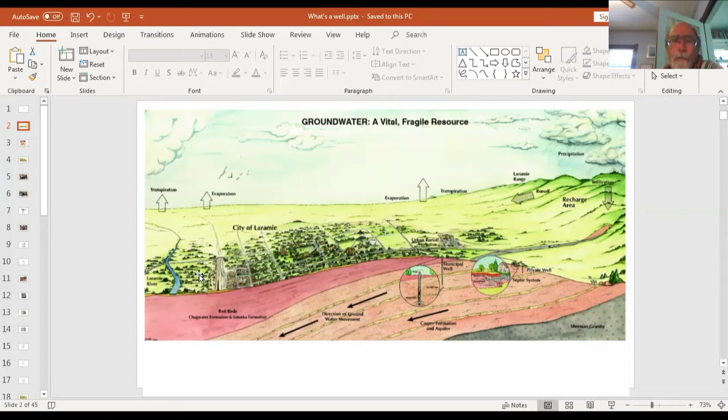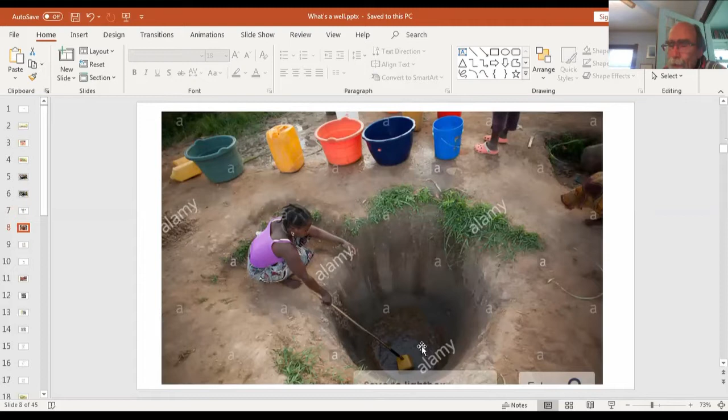It may not be enough to do anything useful with, and it may not be fit to drink, but in most cases there's water down there somewhere. Most of the world, when they're drilling a well, either paw out a hole as an elephant or a horse will do, or humans, with a bit more ingenuity, will actually dig a well. So they end up looking like this. This one they didn't need to case because the earth materials were stout enough to hold up by themselves, and she just runs her bucket down there on a stick and pulls the water out.

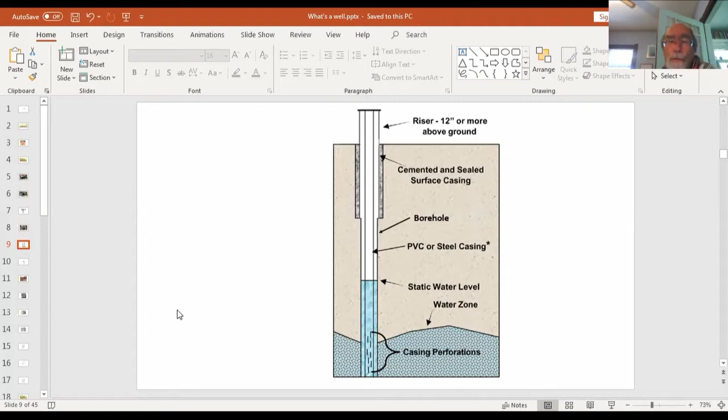And that is done with a drill rig. So if you're with me on shoving the hose in the ground - I can't go very far, but if I wanted to go further, I'd put some teeth on the end of that hose and grind it around. I'd substitute for my garden hose a piece of pipe with some teeth on the end, but I'd still be squirting water down through it, so as those teeth ground things up, I'd be flushing the grindings up the sides of the hole.

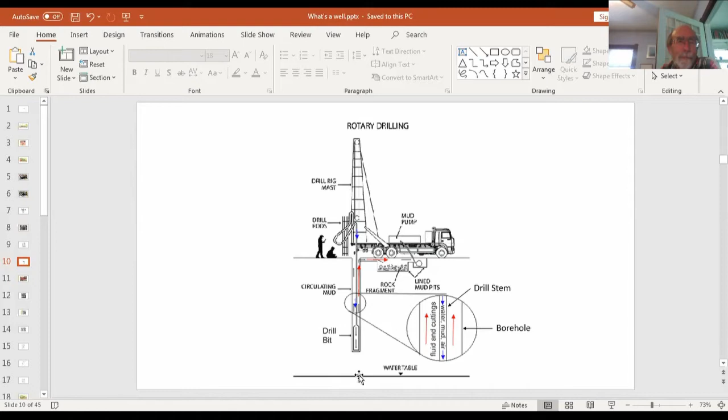My little drill rig here is drilling a water well. He's going to keep grinding this away until it gets down to the water table, he or she, and then we'll go ahead and put some casing in the hole and have us a well.

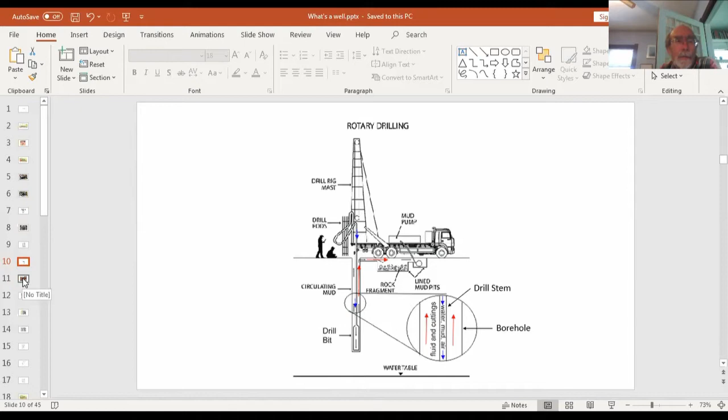Okay, so that's what you see when somebody's out there with their drill rig. Turning back to the local situation, what we want to do is grind our drill rig down through all these layers.

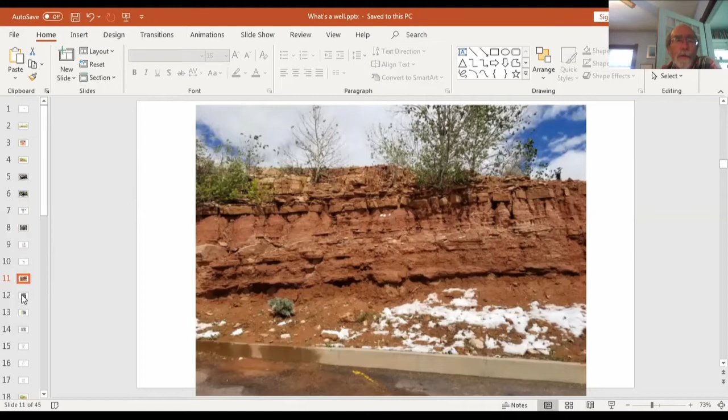And then all that's coming back to the surface, either with compressed air or with a thin mud or just water. At the end of that process, you've got samples that you've taken as you drilled along.

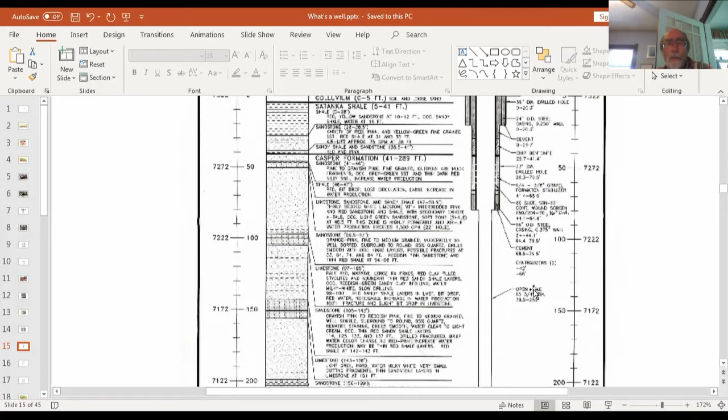That's an important benchmark in drilling a well in this area. And then what Chris is showing us on the right-hand side is how the well was completed. So here's the casing that was put in, the seal around the casing, and we'll talk a little bit about that in a minute. And then in this case, the lower part of this well is open hole. It was stout enough rock that you could drill a hole in it and it would not collapse back on you.

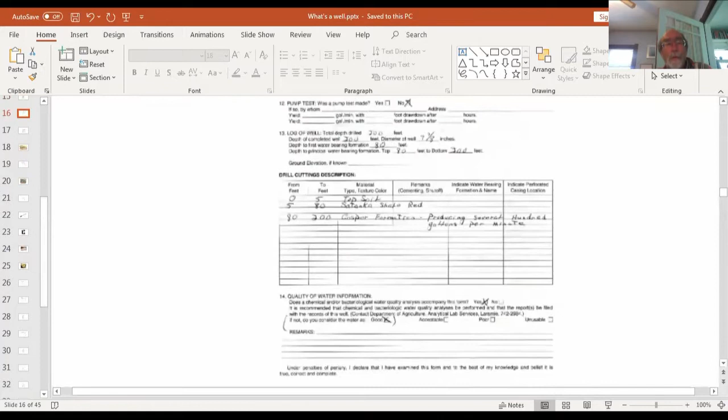Now, much more commonly, what we see are logs that are submitted with the well on a domestic well, something more like this, because the state requires you to get a permit and to declare what you actually did. So this is a well log from one of the wells out on the aquifer that was done for a domestic well, just by the driller. And some of the drillers are better than others, and you learn the local drillers as you work with a lot of these logs.

In this case, the driller felt that he was confident that he was in the Satanka red shale because of its color down to 80 feet. And then at 80 feet, this driller decided he was in the Casper Formation. We have to decide whether we believe him or not. But no, not an unreasonable thing to say. He doesn't tell us much about it in terms of whether it's sandstone or limestone, but he's told us that in his opinion he's in the Casper. So we can look at a bunch of those, make up of what we will.

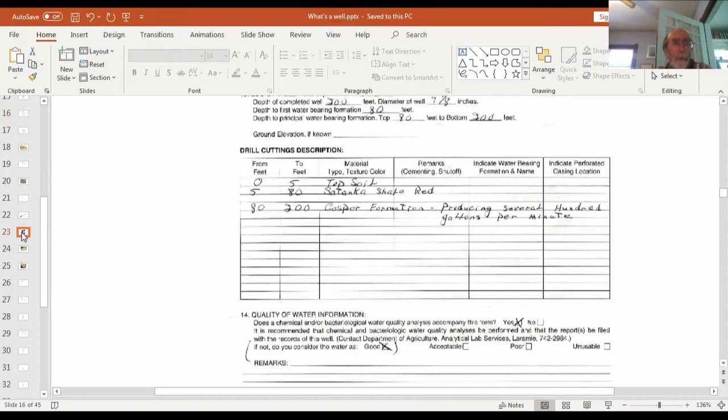Now let's see, where am I? I'll probably back up. Figure out where I am.

Okay. Sometimes these individual logs that you'll see won't attempt to call out the formation, and we geologists actually would prefer that the driller not get too carried away. We'd rather have them tell us what they see and let us decide what it is. So in this case, our driller has told us he's drilled 3 feet of just loose material and then clay. That's probably Satanka based on this location. Sandstone sounds kind of Casperish, and then he's hit a lime rock here, and we might be able to match that up with one of the limestones in the Casper and convince ourselves that he actually hit the Casper formation at 18 feet.

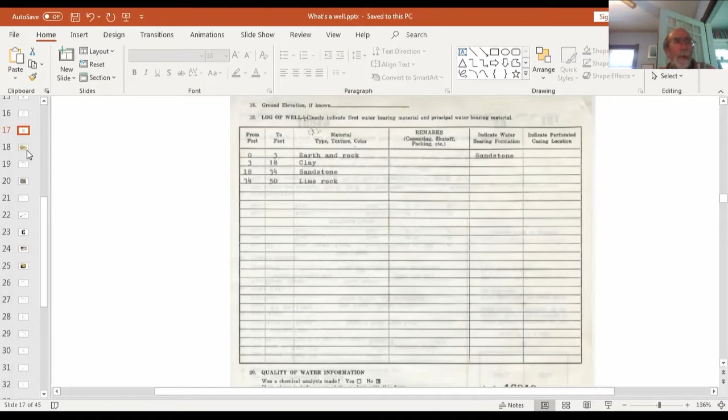Okay, back to here. Now we have our little private well and then the septic system that goes with it. Let me shrink this down a little bit better. So what, with respect to aquifer protection and the mission of the Albany County Clean Water Advocates?

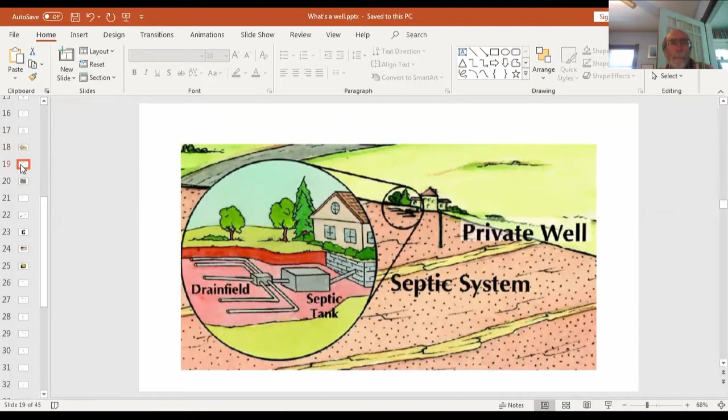Okay, let's go to a cartoon vision of things. Here I've identified a contaminant source. In this case, I've drawn it as if it was a septic system slightly below the surface, but let's keep in mind, as I said earlier, that this can be any surface or near subsurface based contaminant source.

Above the water table, there's no interference. It's just finding its way down, soaking into the ground. And that continues until it hits the water table. So in this zone, there's no opportunity for dilution particularly, some attenuation, and this is the zone that was experimented on by the recent Lidstone report for the county using a leach field out in the Sherman Hills, and they found nitrate concentrations. Again, nitrate just as one of many potential contaminants in the 40 to 60, maybe even 75 milligram range as it made its way from the septic tank down to the water table.

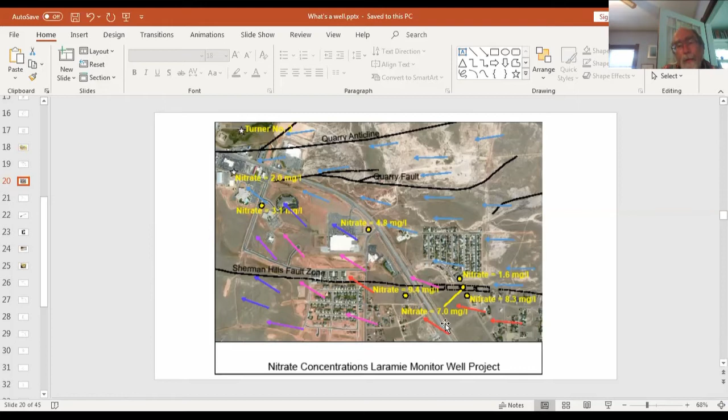But the same process is going on, and the solution to pollution is dilution works here, and it's why the folks that are most immediately impacted are the wells in this area, and then as we get down to the municipal wells, we have the advantage of substantial dilution. So it's really the same picture vertically as well as horizontally.

Okay, so now let's talk about the well screen. So we've got a hole in the ground, and now we put some casing in it so that it won't collapse on us, but now we need a way for the water to get into our casing.

And you'll see the word screen, which never looks like window screen, but serves the same purpose. The window screen filters the bugs out and the leaves and so forth, and the well screen filters the dirt and the rock out. So that screened section is where the water enters the well.

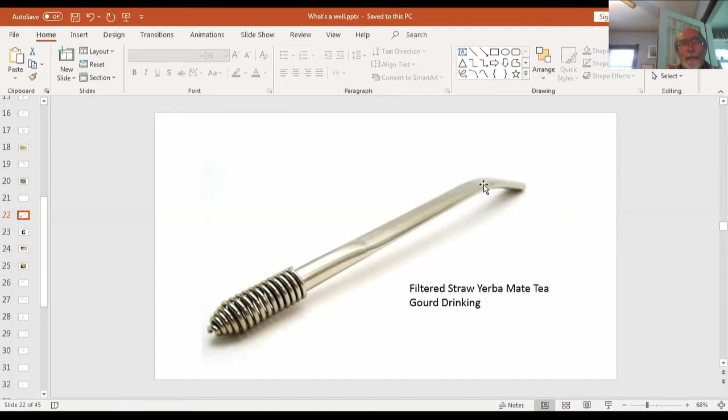That process is very like this straw that you use to drink mate tea, where we would call this the well screen. We'd call this the casing, and as you draw water out of it, the screen keeps the tea leaves from sucking up into your mouth, and you end up with a cleaner stream of mate back to your user at the surface. The well equivalents come in quite a variety of forms.

Just here's a picture of some well screen, as it's called. That's actually a PVC wire that's wrapped around and around and around in a spiral with just the right spacing in between to hold the sand back and let the water through.

And anybody wants to holler in the middle of this, go right ahead.

I'll just roll along. Here's the most common well screen used in the domestic wells in our area. It's slotted casing, and these slots are carefully controlled for their width. When one finds a slot that keeps the dirt out and lets the water in, that's a balance that you have to find. Here would be some steel well screen. It doesn't look like screen. What you're looking at here is a piece of steel that was slotted with a cutting torch.

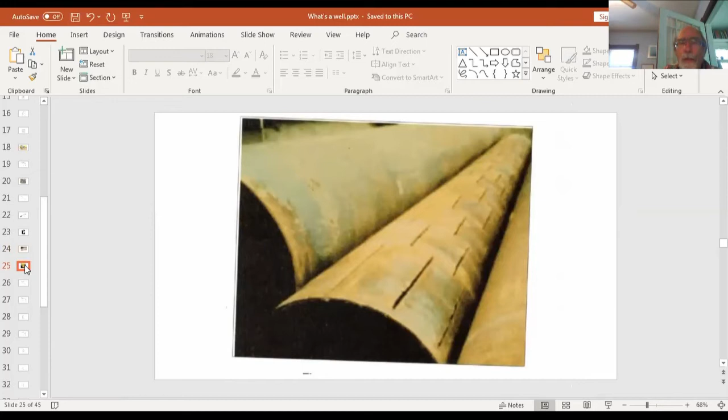We can build these out of any material. In the big wells, you'll typically see a screen like this, but all made out of stainless steel, in sizes anywhere from 4 inches in diameter to 24 inches in diameter.

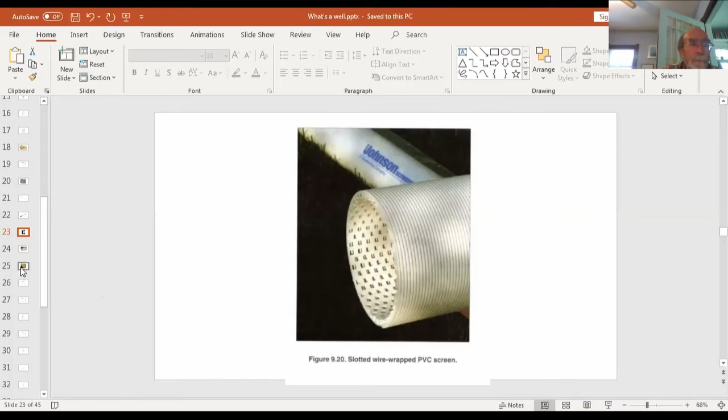Okay, so let's think about how contamination might get into our well now that we've put our well screen into it.

Requirements from time immemorial are that you have 100-foot spacing between your well and your leach field for a typical domestic system, and that continues to be required. That's just standard practice. Good practice would actually be to reverse this and put the well on the up-gradient side, so that when you hit the groundwater, it's all swept away from your well. So there's that basic 100-foot minimum.

DEQ requirements, when one does an analysis of the impact on aquifers, suggest that this first 30 feet is the critical zone in which one is most likely to see contamination from any surface source. Now, okay, so here's a shallow domestic well. Let's continue our story.

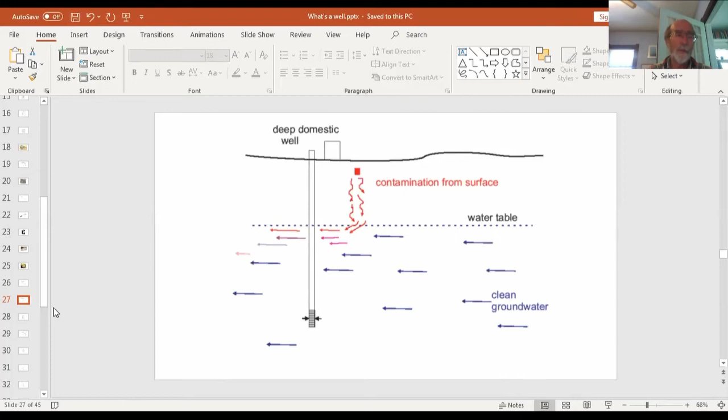The deeper you go, as you can see on the diagram, the less subject you are to these surface sources of contamination. Now, there's about 500 wells out there, so it's never quite just you and you alone, but basically you would like to get as much of this clean groundwater and as little of this contaminated groundwater as you can. One way to improve your odds is to drill your well deeper and then put your screens at the bottom so that you are sucking in the water here rather than sucking in the water here. So this would be a deep domestic well and would be a less vulnerable well to surface contamination.

A monitor well - and you've probably all heard me talk about how domestic wells aren't monitor wells.

If you're looking for whether your crankcase is leaking or not, you look for the oil spots on the driveway, not over in the rose bed.

There's a lot of confusion where somebody says, I monitored the water quality in my well and it was just fine. But that isn't a monitor well in the sense of a well deliberately built, located, and completed to monitor the impact on groundwater. When we build a dedicated monitor well, we screen it right where we're most likely to see this impact. A shallow domestic well, wherever it went, yeah, that's close, but any supply well is going to be deliberately completed somewhat deeper in the aquifer than right at the water table. So data from domestic wells is inevitably skewed away from the worst of the contamination, for obvious reasons. But it's different than a monitor well for that reason.

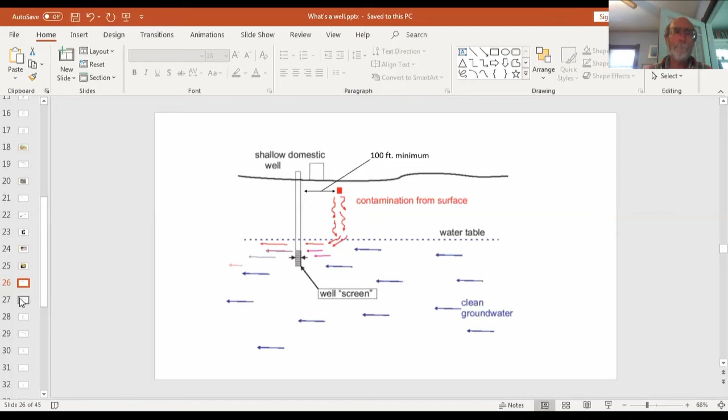When you say organic compounds, you're talking about compounds with carbon in them, right? Yeah, not organic like organic groceries. Right, organic compounds—those carbon rings, alkanes, alkenes, ethylenes, and things people may remember from chemistry courses. Those tend to be toxic in various ways.

So there's my pitch on why monitor wells are different. We have very few of these monitor wells in the Casper Aquifer that are actually built, dedicated, located, and completed as groundwater contamination monitor wells. There are maybe 3.

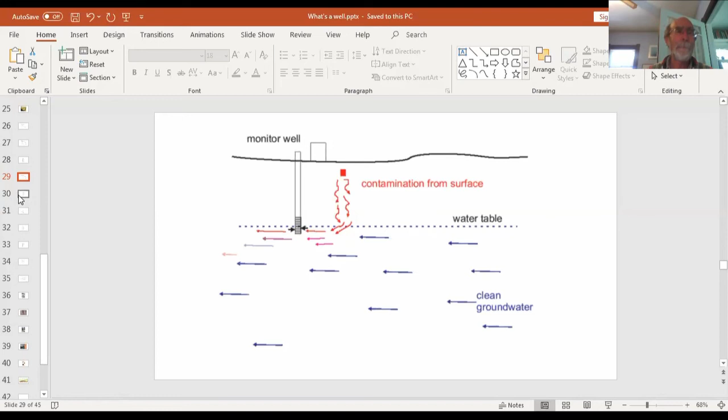And here's a monitor well. This is the well in that little triangle piece—no, this is on the south side of Imperial Heights Park, just short of Sherman Hills. In this case, we drilled it down through the several layers of the Casper: a sand, a lime, another sand, a lime, another sand, another lime—and then we filled it all back in because we did not want to take water from further down in the aquifer. We wanted to take water out of this sandstone.

Here's our water table right here. So we've left the well open from here to here. Here's our little pump. This is what a monitor well, properly completed and located, looks like. And that well serves no other purpose than to periodically monitor the water quality at that point.

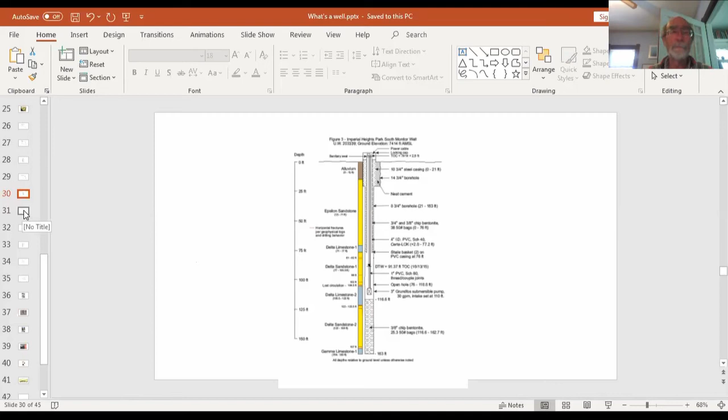So now let's talk about the well seal. We've talked about how deep the well is and the screen, but now we have to talk about what's around my casing. In my little garden example, I was just packing this full of dirt to keep mice from crawling down. But many of the older wells, particularly, the idea of the casing was just to keep the dirt from collapsing into the well, and we didn't care if it collapsed or not.

So there are wells out there that have nothing behind the casing, meaning between the casing and the borehole. They're susceptible to water just from the surface running off the pavement, or somebody dumping their oil out there, running down along the casing. Even though the well is deep and screened fairly deep in a clean part of the aquifer, it's going to see the contamination coming down alongside the casing.

So you'll hear people say, oh, the aquifer isn't contaminated, it's the casing. It's kind of a bizarre thing. Well, it's a failure of the seal, and there has to be a source of contamination for there to be a problem. So you'll hear it said as though the casing itself is somehow dissolving and corrupting the water supply.

What that means is, yes, the way the well was completed allows easier passage of surface-based contaminants, either surface or near subsurface, to find their way either directly down the well, or even if I've just contaminated the top of the aquifer—remember I'm sucking water out here, so it's going to want to come into the well and go down and come back out my well. So this is the poorest well completion, and there are plenty of those out there.

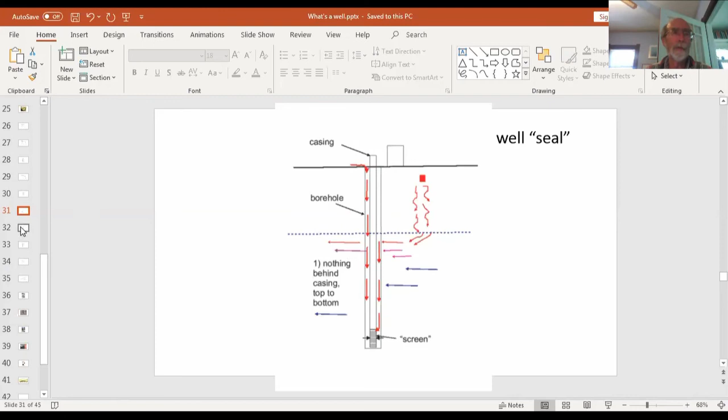The next, and still quite common, is where you filled that annular space, the space between the casing and the borehole, with gravel. That's thrown in mainly to help keep the dirt out of your screen and to hold the sides of the well out. But once you're throwing gravel into that cavity, it was quite common in the older days to fill it clear to the surface. So yes, it inhibits the flow of water off the surface and down the sides, or even through the aquifer and down the sides, but it certainly does not preclude it. It's harder to run through a donut of gravel than through just open air, but still, this is certainly less than a desirable way to finish up a well. And there are lots of those out there.

Better is something that has a surface seal, at least, where for the first 10, 20 feet, we've surrounded the casing with cement. So now I've precluded material running across the surface and down the well. And that's good. This is required now of any well drilled in the state of Wyoming, if it complies with the minimum well construction standards. All the drillers in Wyoming these days, as of the last 8 to 10 years, are required to be licensed and to conform with these kind of most basic construction standards.

It does not, however, protect my well screen from contaminants that soak down—not going down the well casing, but just through the ground, in the dirt, like my septic system here—getting into the top of the aquifer and again running down through the gravel pack into the screen. So better, but you're still not quite there.

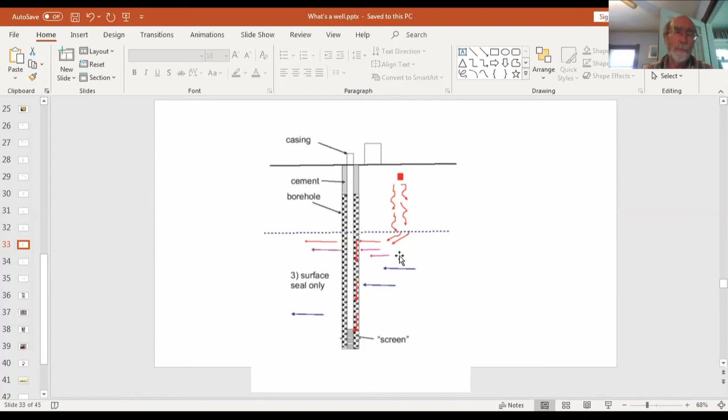Best and most expensive, and therefore less common, is to surround that casing with cement all the way through the aquifer to the place where you want to get the water. This construction makes sure that the only way water can get into this well is from these zones rather than from these zones. So this is the way you would properly complete a well, and if you do so, your chances of contamination are less. Now, what happens up here in terms of contamination finding its way down is a different story, but this is the best you can do for yourself.

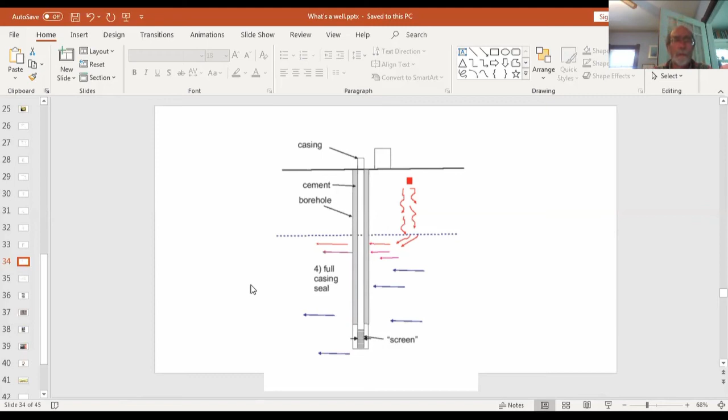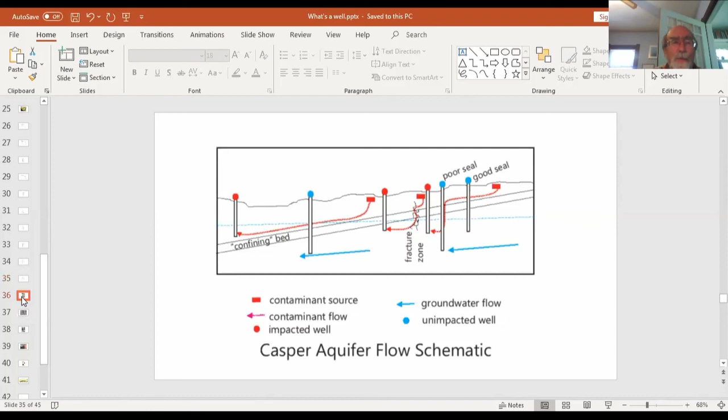Whoop, it isn't. You're not seeing what I'm seeing? Oh, well, when did I lose you? Back at the monitor, stuck on the monitor one. Oh, well, you didn't see this one with all the red dots and blue dots? Okay. On that one? Okay, now I'm looking at a shed, Sarah? Huh. Well, I don't know how to just change that. Should I stop sharing? And then try sharing again? Okay, now do you see a building?